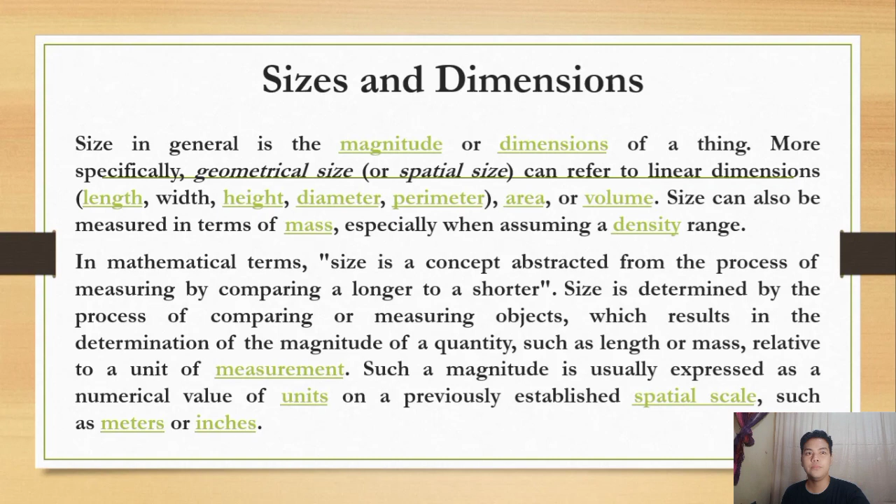The sizes with which humans tend to be most familiar are body dimensions, measures of anthropometry, which include measures such as human height and human body weight. These measures can, in the aggregate, allow the generation of commercially useful distributions of products that accommodate expected body sizes, as with the creation of clothing sizes and shoe sizes, and with the standardization of door frame dimensions, ceiling heights, and bed sizes.

The human experience of size can lead to a psychological tendency towards size bias, wherein the relative importance or perceived complexity of organisms and other objects is judged based on their size relative to humans, and particularly whether this size makes them easy to observe without aid.

In many fields, including architecture, engineering, and manufacturing, accurate sizing and dimensioning are crucial for ensuring that objects and structures fit together properly and function as intended. Sizes and dimensions can be expressed using a variety of measurement systems, including metric and imperial units. In the metric system, units of length include millimeters, centimeters, meters, and kilometers, while in the imperial system, units of length include inches, feet, yards, and miles.

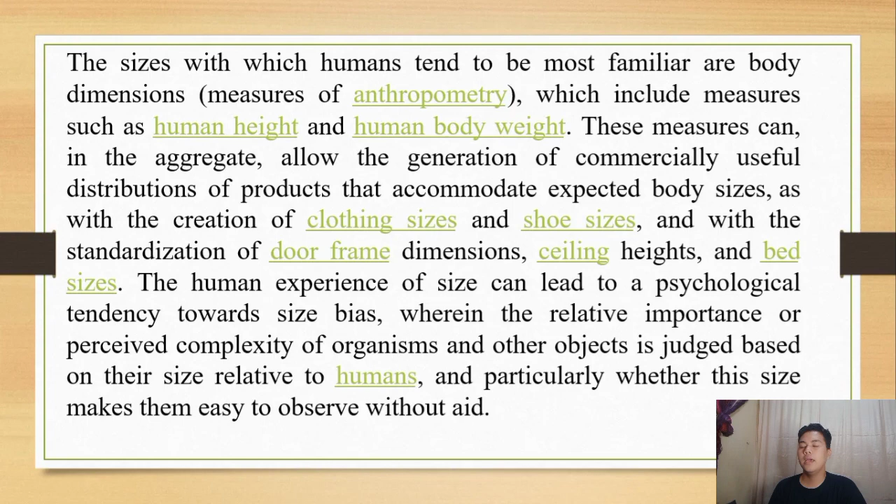It's important to note that when working with sizes and dimensions, precision is the key. Even small variations or errors in measurement can have a significant impact on the functionality or safety of an object or structure. Therefore, it is important to use appropriate tools and techniques to ensure accurate measurements.

The dimension of a mathematical space or object is informally defined as the minimum number of coordinates needed to specify any point within it. Thus, a line has a dimension of 1 because only one coordinate is needed to specify a point on it, for example, the point at 5 on a number line. A surface such as the boundary of a cylinder or sphere has a dimension of 2 because two coordinates are needed to specify a point on it. For example, both a latitude and longitude are required to locate a point on the surface of a sphere.

A two-dimensional Euclidean space is a two-dimensional space on the plane. The inside of a cube, a cylinder, or a sphere is three-dimensional or 3D because three coordinates are needed to locate a point within these spaces.

In commercial buildings, ceiling heights can vary depending on the intended use of the space. For example, retail stores may have higher ceilings to accommodate displays and signage, while office buildings may have lower ceilings to promote a more intimate atmosphere. In some spaces, such as a theater or concert hall, ceiling heights may be especially high to accommodate stage equipment and lighting. Additionally, some buildings may have special features such as vaulted ceilings or skylights, which can add to the overall height and aesthetic appeal of the space.

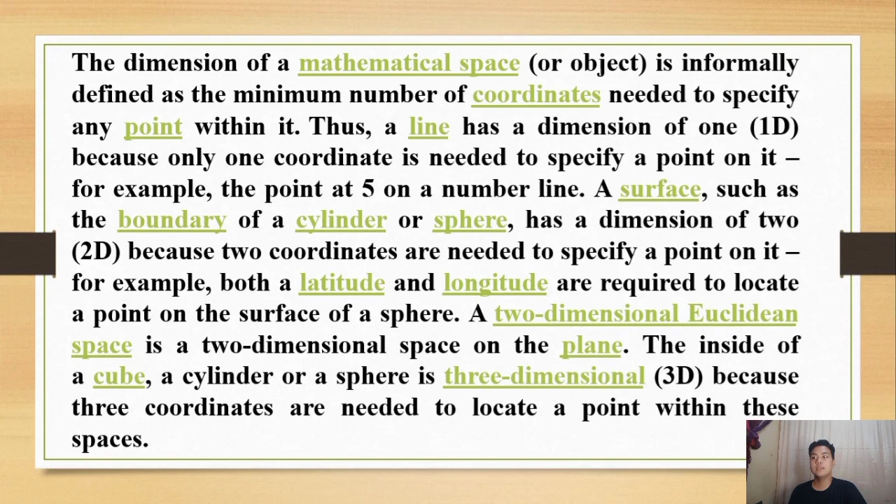So, for the ceiling heights, certain domestic features are taken for granted in today's new home market: granite countertops in kitchens, separate glass-walled showers in bathrooms, walk-in closets in bedrooms. Another feature that has become common in new production houses is the high ceiling.

According to the National Building Code or NBC, the standard ceiling height is 96 inches or 8 feet. For suspended ceilings, the minimum height is 90 inches or 7.5 feet. But 9 and 10-foot ceilings are now common, not only in living rooms and kitchens, but also in the bedroom. Even taller ceilings are appearing in custom homes, yet, not so long ago, 8-foot ceilings were the norm.

The reason for the change is renewed appreciation of taller rooms. Thanks to the conservation and secondary use of older buildings, an increased use of daylighting also explains taller ceilings of 10 to 11 feet in office buildings.

Airspace requirements can vary depending on the specific materials or objects involved, as well as local building codes and regulations. For example, insulation materials may require a certain amount of airspace to prevent moisture buildup, while electrical components may require airspace to dissipate heat.

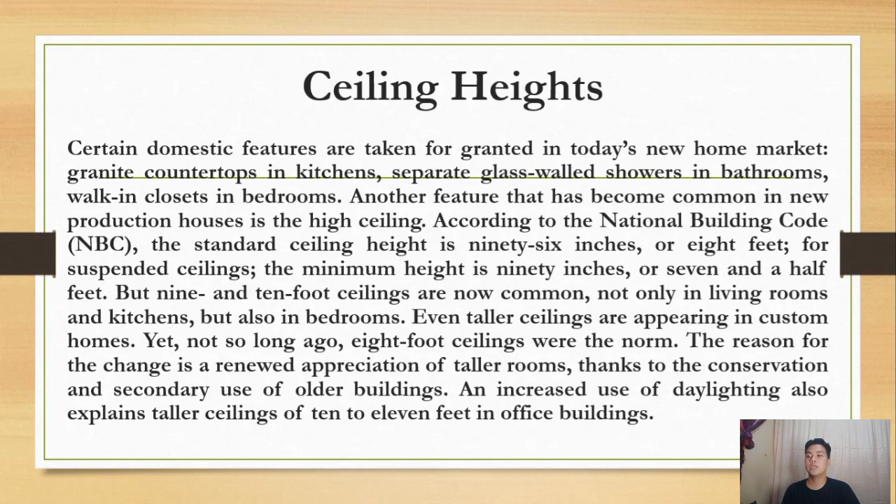Airspace requirements. The two categories of airspace are regulatory and non-regulatory. Within these two categories, there are 4 types: controlled, uncontrolled, special use, and other airspace. The categories and types of airspace are dictated by the complexity or density of aircraft movement, nature of the operation conducted within the airspace, the level of safety required, and national and public interest.

It's important to note that while these guidelines can be useful for designing and evaluating living spaces, they are not absolute requirements. Factors such as building design, climate, and cultural norms can all impact the appropriate sizes of rooms for human habitation.

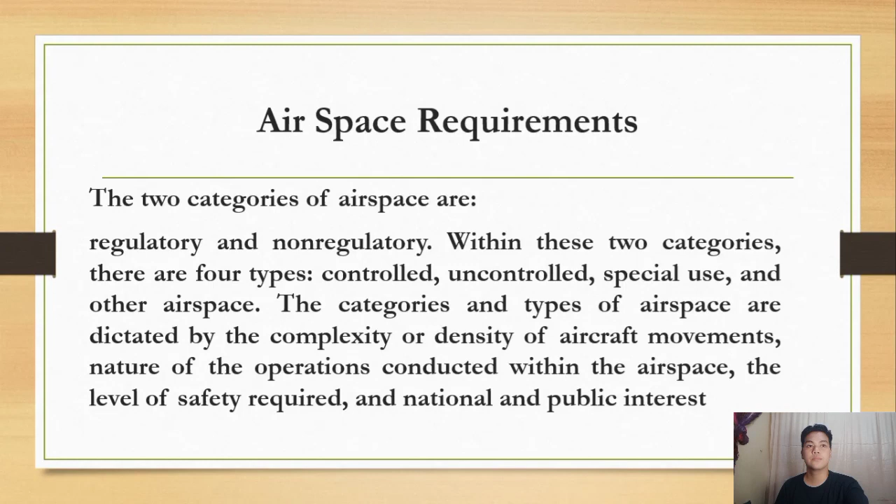Airspace is the portion of the atmosphere controlled by a country above its territory, including its territorial waters, or, more generally, any specific three-dimensional portion of the atmosphere. It is not the same as aerospace, which is the general term for Earth's atmosphere and the outer space in its vicinity.

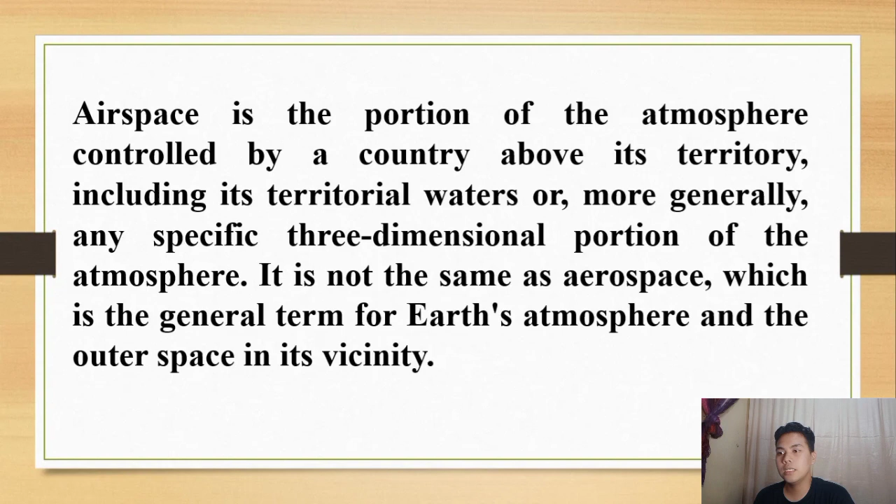Sizes of rooms for human habitation. Rooms shall have a minimum of 6 square meters or 65 square feet with a least horizontal dimension of 2 meters, 6 feet and 7 inches.

For rooms of human habitation, 3 square meters or 32 square feet with a least horizontal dimension of 1.5 meters or 5 feet for kitchens, and 1.2 square meters or 13 square feet with a least horizontal dimension of 90 centimeters, 3 feet for bathrooms.

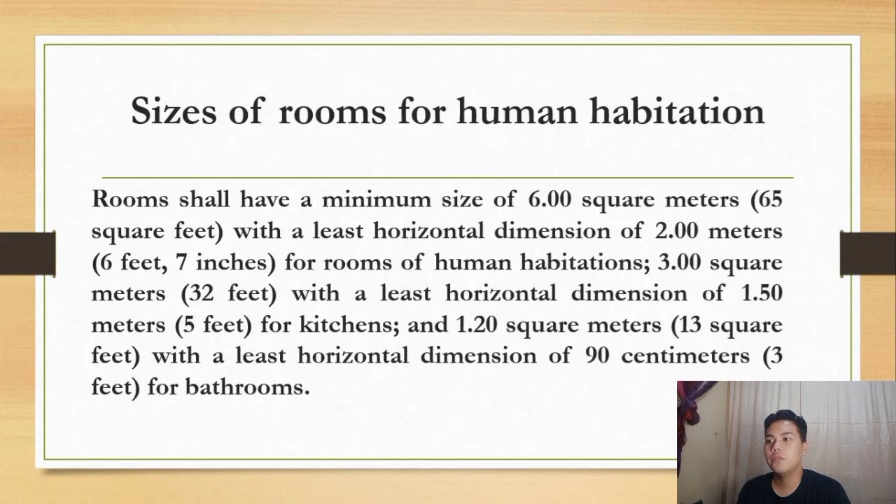So next we have sanitation. Every dwelling shall be provided with at least one sanitary toilet and adequate washing and drainage facilities. Next we have foundation. Footings shall be of sufficient size and strength to support the load of the dwelling and shall be at least 30 centimeters or 1 foot thick and 60 centimeters or 2 feet below the surface of the ground. Each post shall be anchored to such footings by straps and bolts of adequate size.

Next, we have posts or support tails. The dimensions of wooden posts or support tails shall be those found in Table 3.1, dimensions of wooden posts or post tails, Annex B. So next we have floor. The live load of the first floor shall be at least 200 kilograms per square meter or 40 pounds per square foot, and for the second floor, at least 150 kilograms per square meter or 30 pounds per square foot.

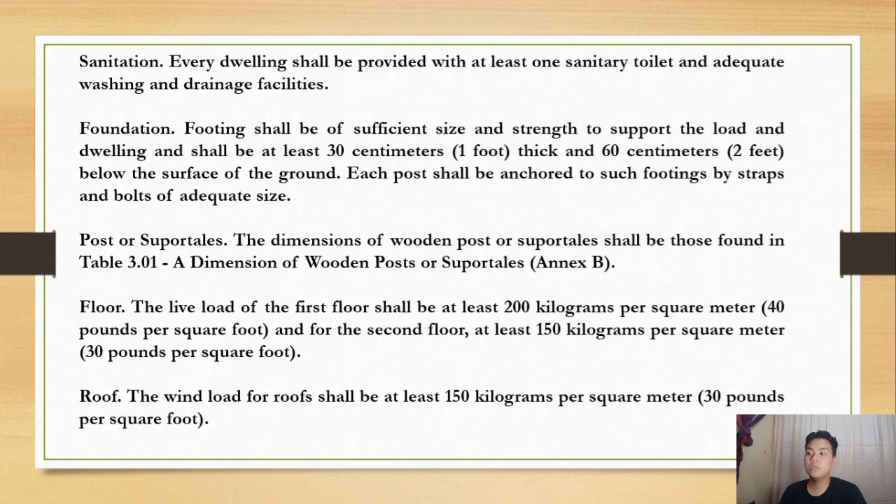So next we have roof. The wind load for roofs shall be at least 150 kilograms per square meter or 30 pounds per square foot. And next we have stairs. The stairs may be 75 centimeters or 30 inches wide with a rise of 20 centimeters or 8 inches and a run of 23 centimeters or 9 inches. Entrance and exit. There shall be one entrance and one exit.

Next, we have electrical outlets. There shall be at least one convenience outlet per 6 meters or 20 feet of wall measured along the floor and one light outlet for every room. Next, we have mechanical requirements. Family dwellings not more than 2 stories shall be exempt from the requirements of the mechanical code.